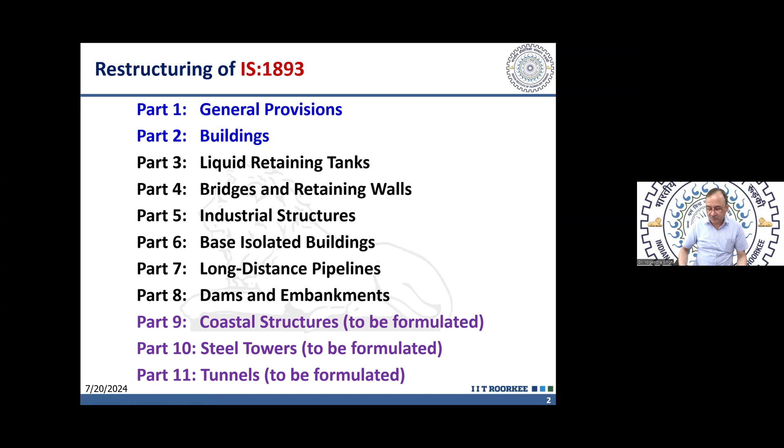And similarly, another set of codes will be under this number IS 13920. So parts will remain same. The structures which these parts will be dealing with will remain same. And in IS 1893, all the provisions related to calculation of the forces, earthquake forces on these structures, those will be dealt with. And in IS 13920, the design and detailing, in addition to the basic design codes. For example, in case of RCC, the basic design code is IS 456. So whatever is needed in addition to IS 456 from earthquake resistant design point of view, that will be covered by different parts of IS 13920.

And these parts, most of these are yet to be developed. These are not still developed. At the moment, only two parts are available: Part 1, general provisions, and Part 2, buildings. And rest of these will come in due course of time. But a placeholder is kept so that whenever these codes are developed, those can become part of this series.

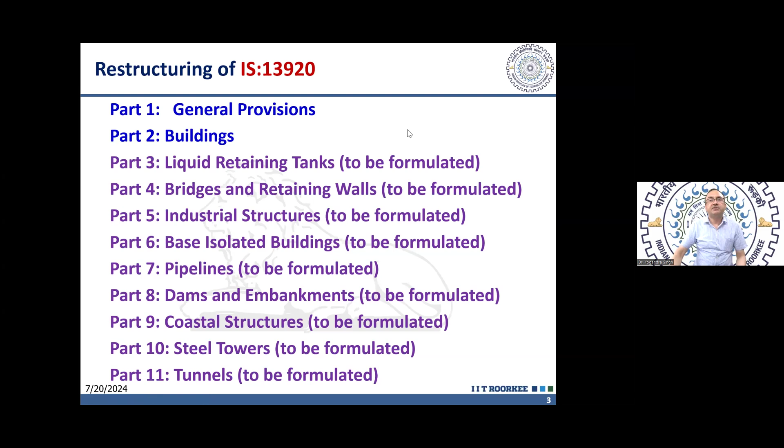So in IS 13920 Part 1, today we will discuss IS 13920 Part 1 and Part 2. And there are different sections in Part 1 and Part 2. Again, those sections also remain same. Those are dealing with the same type of structures. So for example, Section 1 is regarding the additional criteria for all structures. So as I said, this code is talking about additional criteria in addition to the basic codes.

So every structure has a basic code. For example, in case of masonry, the basic code is IS 1905. And 4326 was also dealing with some of the provisions. So whatever provisions were there in IS 4326 regarding design of masonry structure, those have been brought into this code. And similarly, some special publications or other codes were published time to time. So those have also been brought under this single volume, which will consist of 4 sections. So Section 1 will be regarding additional criteria for all structures. Section 2 will be regarding masonry structures. And what changes are occurring, that is also mentioned here.

The changes are occurring to harmonize these codes with other available provisions. Some provisions are being made part of it, and some provisions beyond CED 39 belong to a different committee. There will be harmony between those, so there should not be drastic or contradictory provisions in the two codes. That will be ensured through this revision.

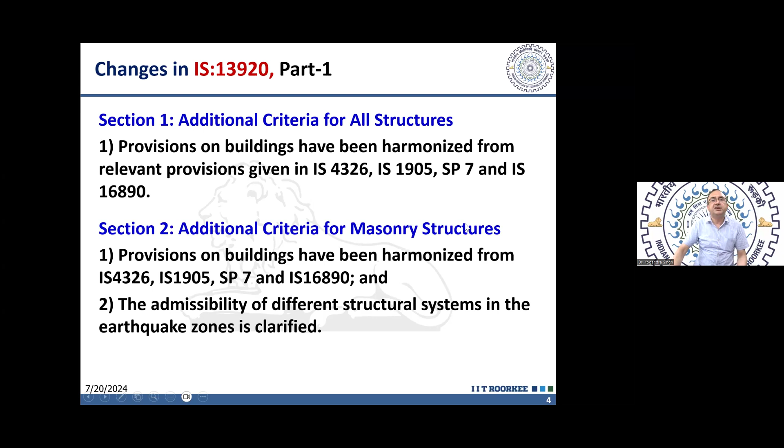Similarly for masonry structures, we are most interested in RCC structures, and today we will focus on whatever clauses are there in Part 1 and Part 2 related to RCC structures, because that is the most common type of construction in our country, and I guess most of you are also interested in RCC structures.

Steel structures are not that common, and masonry structures are generally non-engineered type of construction, or pre-engineered. So the code will provide prescriptive design guidelines which can be followed in masonry structures. We are not talking about those today, but if there is an interested group, we can have a separate discussion on masonry structures.

There is additional criteria for steel structures also. You may be aware that the ductile detailing code for steel structures was developed recently. So now we have a ductile detailing code for steel structures, and that will also be brought as part of 13920. So 13920 will deal with all types of structures and all types of materials of construction.

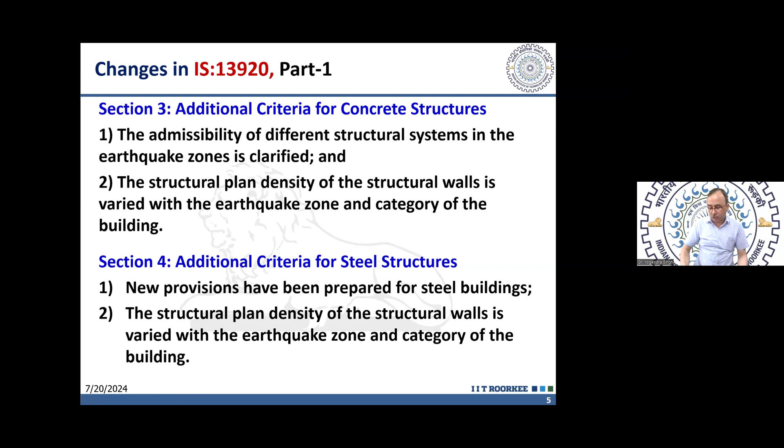Now in IS 13920 Part 1, let's first talk about Part 1, what this Part 1 is doing, and I will be highlighting those provisions where changes have been made with respect to the previous codes. Whatever changes are being made, I will try to highlight. Then after this presentation, we can have further discussion on these clauses as well as some other clauses in which you may be interested.

So from the questions, I have discovered that some interest is there in the changes being made in IS 1893 also. I'm not presenting the changes with IS 1893 because as informed by Mr. Parulekar, one session on that has already been done. So we are not discussing that, but if there is any specific question regarding IS 1893, also the revised or draft version of IS 1893, we can take that up too.

We are focusing here only on those provisions where there is a change. Those which are similar to the previous codes, I will not talk about. So in the scope, it has been clarified what this IS 13920 Part 1 is catering to. The purpose of this code is to enhance earthquake resistance of members and structures.

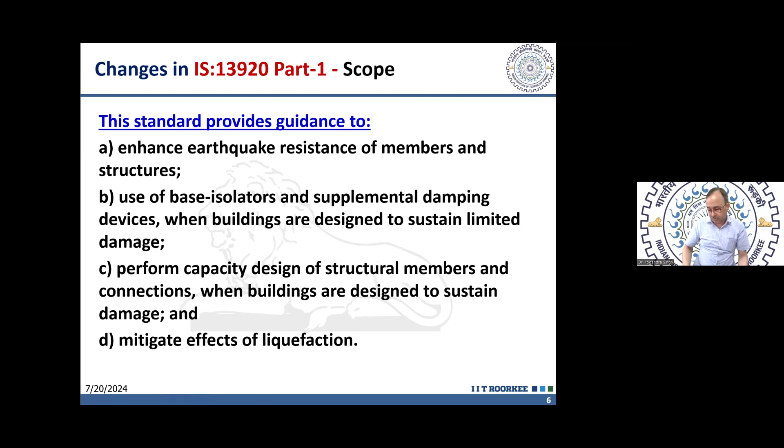And then mitigate the effect of liquefaction. Liquefaction was earlier part of IS 1893. Now it has been made part of IS 1893 revised, as well as 13920. Also some clauses have been added related to liquefaction.

Then these provisions included in this standard are also related to methods of design for architectural and equipments and other units. So equipment, services, and architectural features, all these together, they are calling AEUs. Earlier our code was not dealing with these, but AEUs are having an important role in performance-based design of any structure. For example, if we are designing a hospital building, then the architectural and these ancillary units, other non-structural components, their performance is also important. And this is particularly stringent in context of hospitals and other critical structures.

Then use of some of the building systems have been prohibited or restricted in some of the earthquake zones. So IS 1893 actually provides a table in which structural systems can be used in which zones. A table has been given. Although it is part of IS 1893 and not part of IS 13920, but I have taken that table from IS 1893, and we will spend a few minutes to discuss that also. So the designer has to choose the structural system as per that table.

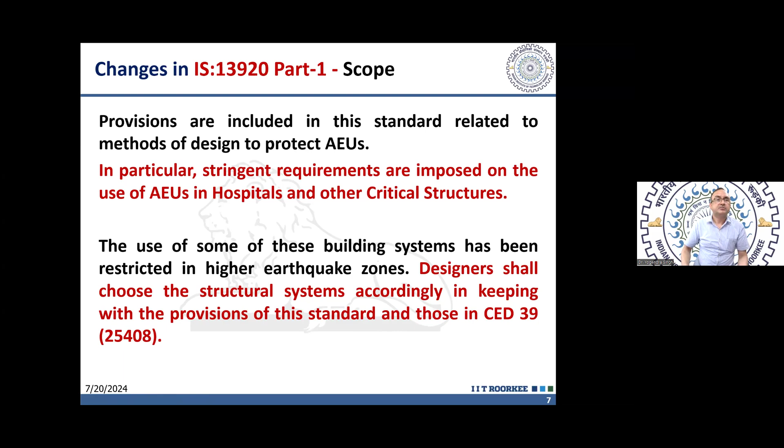Now in IS 13920 part 1, two types of, as I said, two types of structural design approaches are there. One approach is low damage design approach, and another one is the damage in structural elements.

So in case of low damage approach, no member of the lateral load resisting system shall sustain damage under effects of design earthquakes. So under DBE, all the members are expected to remain elastic. So that has now been quantified by the code. Earlier, it was not clear that when we are designing our structures, let us say using dampers or base isolators, then what we are expecting, what performance we are expecting. So that is now clarified by the code, that design we will be doing with this intention that under DBE our structures will remain, all the components will remain elastic.

Only under MCE level earthquake, some members will yield or will undergo damage. And this we can achieve by specially designed devices, which are provided at selected locations. And these devices will dissipate earthquake energy. And the structure will not require to damage itself to dissipate that energy. And that's how we will be able to achieve low damage.

The conventional normal design, which we have been following, that is in the category of damage in structural elements. And it emphasizes that if we are following the conventional methodology, the damage is inevitable. So it has clarified the objectives of design using response control devices, base isolation and damping devices, and the conventional design. That's a major change in IS 13920 revised.

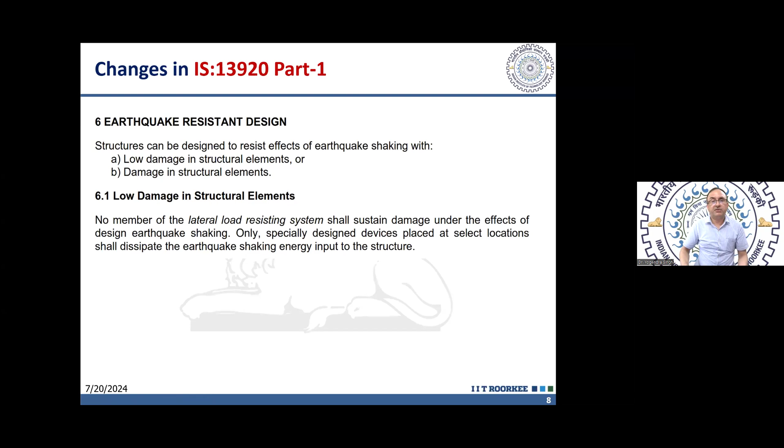Then the measures to mitigate effects of liquefaction at a site are also included. So many sites may be prone to liquefaction during earthquake. Earlier, we were not paying so much attention to liquefaction, but now the revised IS 1893 has given a lot of emphasis on design of foundations and geotechnical aspects, including liquefaction. So some part of that is included in IS 13920 part 1 also, and it provides two approaches to tackle with liquefaction. One is reducing the demand on the soil layer, which can undergo liquefaction, or increasing the capacity. So these techniques are put in two categories.

So those which are reducing the demand are stone columns and piles. If we are providing these, then we are reducing the demand, or we can enhance the capacity. For that, we have to enhance the compaction of that layer somehow, and that can be done through vibro compaction, vibro replacement, or surcharge. So if we are increasing surcharge somehow, then also the pore pressure which is developing will get counterbalanced, and the soil will not undergo liquefaction during that.

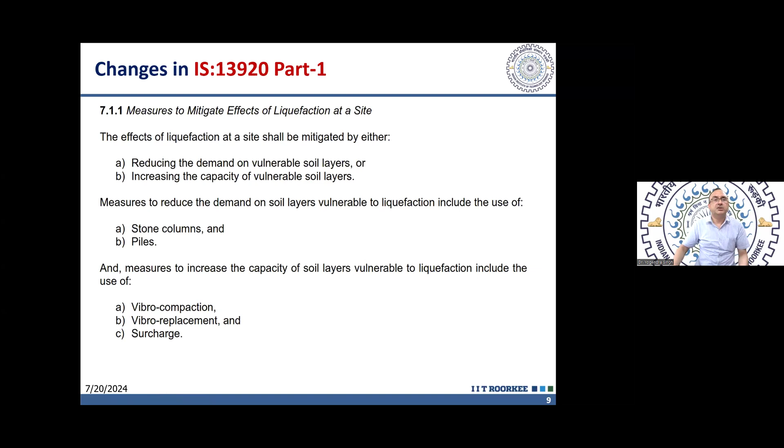As I said, architectural elements and utilities are given special emphasis in this revised code, both IS 1893 and IS 13920. IS 1893 deals with the clauses related to calculation of demand on these structural and non-structural elements.

In calculation of demand, we have to look into the acceleration at that floor level, so floor acceleration demand, and also the story drift demand. How to calculate that is dealt with in IS 1893. And then how to design for that demand is dealt with in IS 13920.

IS 13920 part 1 provides earthquake protection strategy. In case of AEUs, two types of such utilities are there: one is acceleration sensitive. These are generally located on the floor and are subjected to floor acceleration.

These can undergo overturning, sliding, or both. So some arrangement is to be made, some anchorage is to be provided so that these are not overturning and sliding.

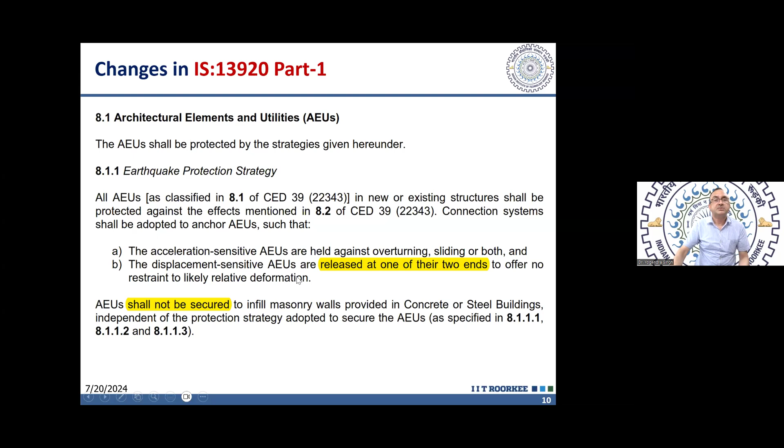In case of critical and lifeline structures like hospitals, special attention is to be given to these AEUs, and some restrictions are there. For example, false ceilings are generally restricted; we should not provide false ceiling in hospitals. If it is required due to medical reasons in any portion of the hospital, then it will not be hung from the soffit of the RC roof.

It will not be hung from roof, because during shaking this may get loosened from the roof and may fall down. Instead, it has to be connected with the vertical RCC components or the beams, but not masonry. It will not be connected with the RCC roof or with masonry components.

Tiles are also to be avoided wherever possible. In case of unreinforced masonry walls, tiles should not be pasted; instead, some sort of painting is recommended.

Similarly, facade made of stone, ceramic, glass, etc., which can dislodge from the structure and fall during earthquake, is restricted and prohibited. Any AEU should not be nailed to unreinforced masonry infill, or be connected or supported by unreinforced masonry infill.

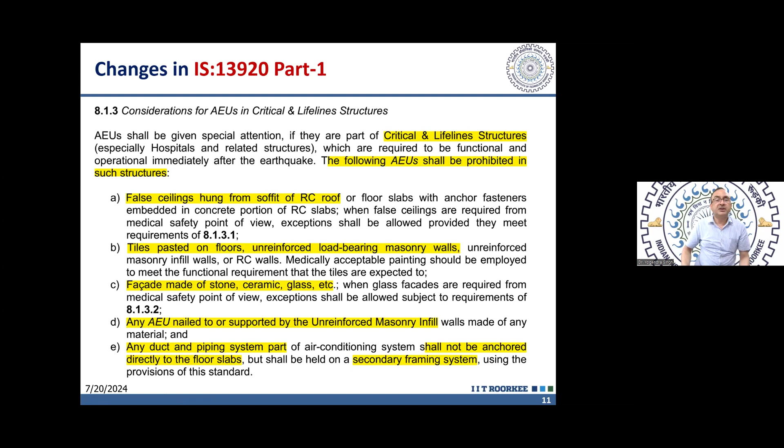Similarly, any duct or piping as part of air conditioning or other services will not be anchored to the floor slab. Rather, it will be provided with a secondary framing system, and that framing system is to be connected with the primary framing system to beams, columns, and shear walls. It will be connected using a framing, not hanging from the slab. So these specific requirements are given in relation to hospital and critical buildings.

This is further explained in context of false ceilings. First of all, false ceiling will be used only sparingly, as I said, not commonly used in case of hospital buildings, and these will be attached to a secondary system.

That secondary system should not be connected to the slab above, but it should be connected to the beams or vertical RCC members. And no false ceiling shall be anchored to unreinforced masonry walls, as I said.

In case when false ceilings cannot be supported by the roof, an independent system is to be supported from the floor slab bottom. It should not hang from the roof; rather it should be supported above the bottom slab. So a support structure, a secondary frame, is to be provided from the floor to the ceiling level.

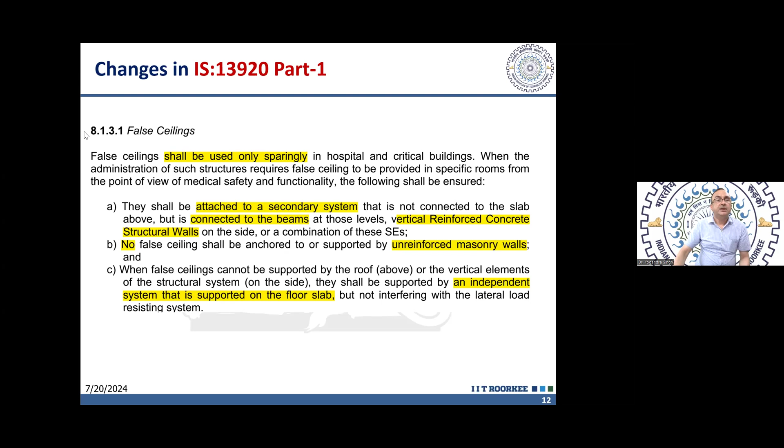Then in case of glazing, also again it is to be avoided in hospital buildings as far as possible. Wherever it is to be provided, it will be designed in such a way, because glazing is being considered as a drift sensitive or displacement sensitive component.

So it should be designed to absorb a lateral drift of R times delta, where R is the elastic force reduction factor and delta is the drift at that level. So whatever story drift is occurring, if it is connected between two stories, that much drift it should be able to sustain between the top and bottom level, and also from the sides.

So this mechanism which is holding the glazing should have the capacity to sustain out of plane vibrations also, because earthquake will have all the three components. So in plane displacement will be absorbed by this mechanism, while at the same time the out of plane acceleration is to be transferred to the structure. So it should be strong enough in the out of plane direction.

And what is important here, and maybe interesting to you, is that for all these glazing components, full scale experimental testing has been made mandatory. It is not specified in the code whether it will be done on shake table or whether quasi-static or pseudo-dynamic displacement testing will be adequate. That is not mentioned, but full-scale experimental testing is required so that it can be ensured that it can absorb the in-plane displacement and support the glazing in the out-of-plane direction, resisting the inertia force which will occur due to out-of-plane acceleration.

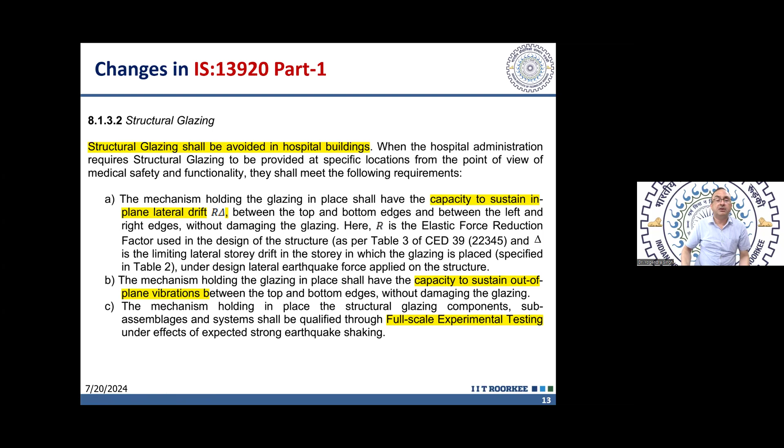So that was about IS 13920 Part 1. Let's now move to IS 13920 Part 2, which is about buildings. And again, this also caters to different types of buildings, not only RCC buildings, but also masonry, RCC, as well as steel buildings.

And the major changes which have occurred in this IS 13920 Part 2, that I'm going to discuss: Part 2 has a first section which is related with all structures. That means when we say all structures here, we mean buildings of different types. So those provisions which are relevant to all types of buildings are included in section 1.

Then section 2 is about masonry buildings. And the major change here is most of the provisions are a compilation of the previous codes. So whatever was there in IS 4326 regarding band and vertical reinforcement has been compiled here. And in 15988, whatever was available regarding confined masonry is also included here. Similarly, guidelines in 13827 and 13828 are also included. And a table is provided showing what type of masonry construction we can use in different zones, so based on this guideline we can decide what type of masonry constructions are suitable for different levels of seismicity. I will not talk about masonry buildings much.

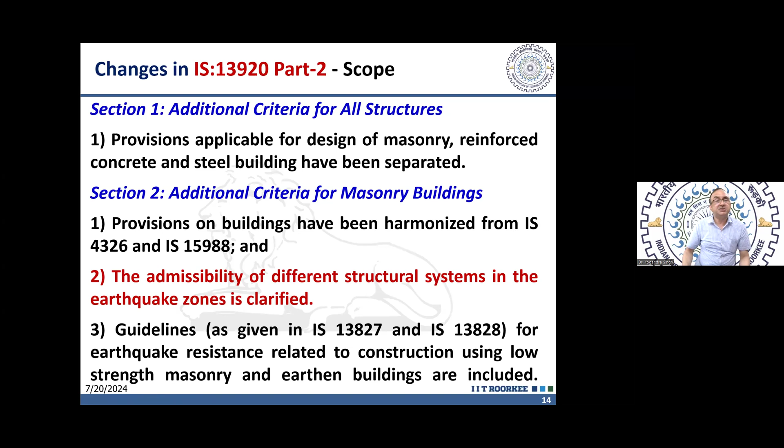Actually, we will be talking about the additional criteria for concrete buildings. And one criteria which the code has written in its scope is the admissibility of different structural systems. Actually, this is specified in IS 1893, not in 13920. That's already given in 1893, and the code is referring to that.

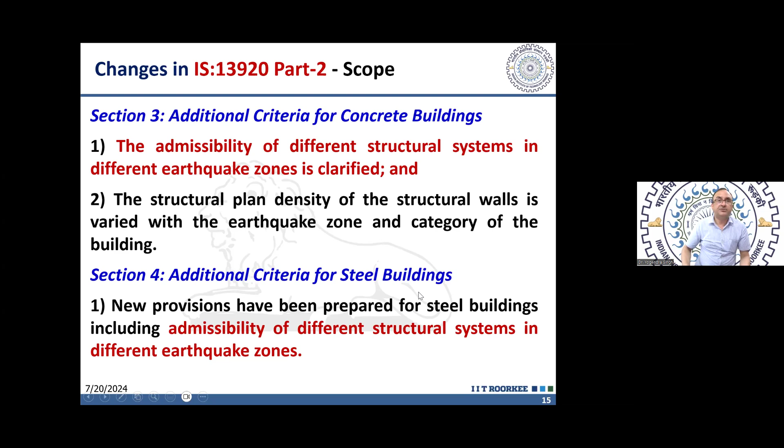And the code provides detailed provisions now regarding plan density of structural walls, and those are varied based on earthquake zone and category of the building. And then similar criteria are also provided for steel buildings as part of this IS 13920 Part 2.

Now, regarding general provisions or scope, IS 13920 Part 2 specifies that cold form light gauge steel members shall not be used as part of the earthquake load resisting system. It is not saying that these are outside the scope of this code, so that the designer is free to use his or her judgment and background and skills to design such structures. It has prohibited use of cold form light gauge steel structures, and this will have, as you can understand, quite severe implications.

So nowhere as part of the lateral load resisting system can these cold form light gauge steel members be used. What I can understand from the language of this clause is that you can use those as secondary systems or gravity load resisting systems, which are to be designed for the same deformability as the main or primary system, but you can't use these as part of the primary system. That's what is prohibited by the code.

Then the provisions of this standard are applicable for all buildings, and especially for critical and lifeline structures, special structures, nuclear power structures, additional requirements may be imposed by the associated authorities. So interestingly, it takes into account and talks about nuclear power plant structures also, which will be governed by this code, in addition to which there will be additional guidelines from the concerned authority regarding those structures.

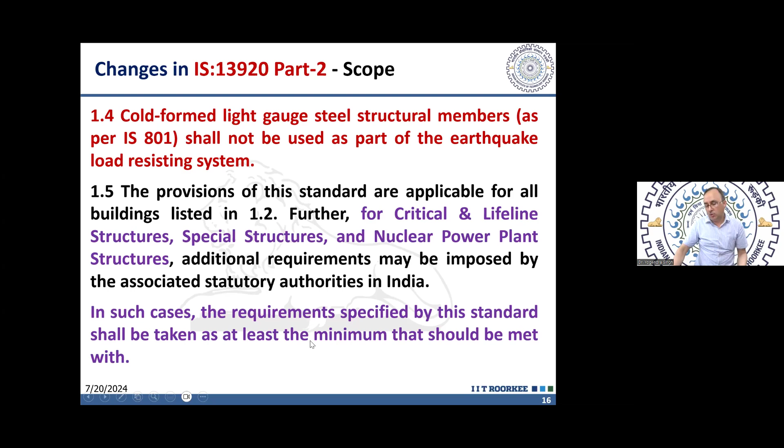The code says that whatever provisions are given in this code, those will be the minimum. So authorities can enhance the provisions and increase the minimum requirements of this code, but those cannot dilute below whatever provisions are given in this code. So those will act as minimum.

The provisions for RCC buildings given in this part shall apply to monolithic RC construction. This is very important, which have ductility to resist the effect of strong earthquake shaking. That means monolithic RCC construction we have to use.

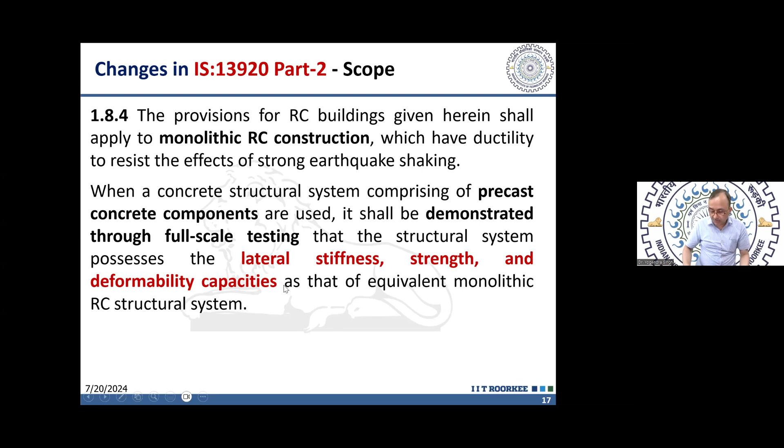If we are using precast concrete components, then we have to demonstrate through full-scale testing that whatever precast system we are using has lateral stiffness, strength, and deformability capacities equivalent to monolithic RCC system. So it is not prohibited. The code is not saying that we can't use precast, but this condition is put, and this condition is quite stringent, and it is not only complex, it will be quite expensive also, because we have to do full-scale tests to demonstrate that lateral stiffness, strength, and deformability of those systems. But in one way, it will be helpful that we can have some standard type of precast systems, which can be verified for one prototype using full-scale testing, and then it can be used repeatedly. So that is allowed by the code.

Monolithically cast concrete structures shall be designed based on the results of structural analysis using a single three-dimensional mathematical model. So this has been underlined by the code now. Earlier also we were using 3D models only. Nobody nowadays was using any 2D model or hand calculations in case of buildings - that was not possible. So those are quite cumbersome. So everybody was doing that, but now the code has made it mandatory that there will be a 3D system.

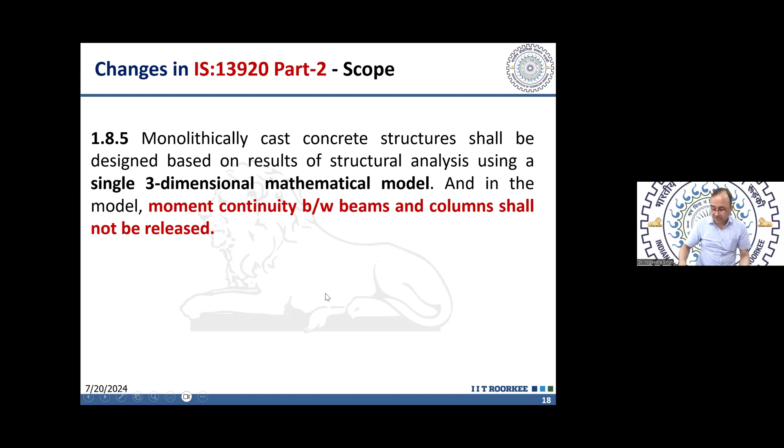And in the model, moment continuity between beams and columns shall not be released. So whatever model, whether we are having gravity columns or lateral load resisting columns, the release between beam and columns will not be provided. So whatever model we are making, the columns and beams will be monolithically connected physically as well as in the model. So many times we were doing analysis where we were releasing the beams and columns - providing releases at the junction of beam and columns. That is not allowed by the code now.

Along one plan direction of the building, we can have moment resisting frame plus shear walls along one direction. So we can have different structural systems in different directions. In one direction, we can have a combination of shear walls and moment resisting frames, whereas in the other direction, we can have only moment resisting frames. And perhaps that is allowed by the code, because the code is insisting that there should be a minimum 10% difference in the time period of the structure in the two directions. That difference generally can be achieved if we are providing shear walls in one direction and only frames in the other. So to achieve that, the code has made it clear that it is admissible - we need not provide shear walls in both directions. In one direction we can have MRFs only.

But there are other clauses. When we look at those, then it may be contradictory. So there are some clauses where the language is written in such a way that it can be contradictory. And maybe we can point out, as part of the comments, that some of the clauses are contradictory. This clause says that in the other direction we can use only RC MRFs, but RC MRFs are not allowed without shear walls in case of high seismicity zones. So this may not be applicable there. Then the options are: planar MRF plus shear walls, or only MRFs.

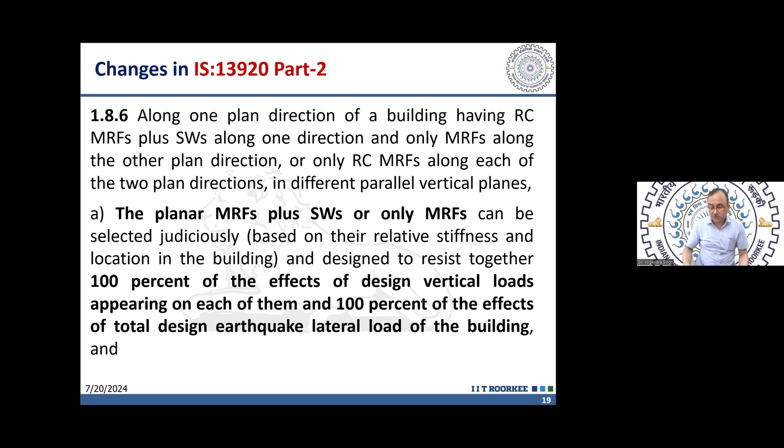So what does that mean? That we can decide the moment resisting frames to behave as non-lateral load resisting elements only if those are provided without shear walls in that plane. That means if the columns and shear walls are provided in the same plane, in the same frame, along the same bay, then we cannot treat those moment resisting frames as gravity frames. That's what is meant by this clause.

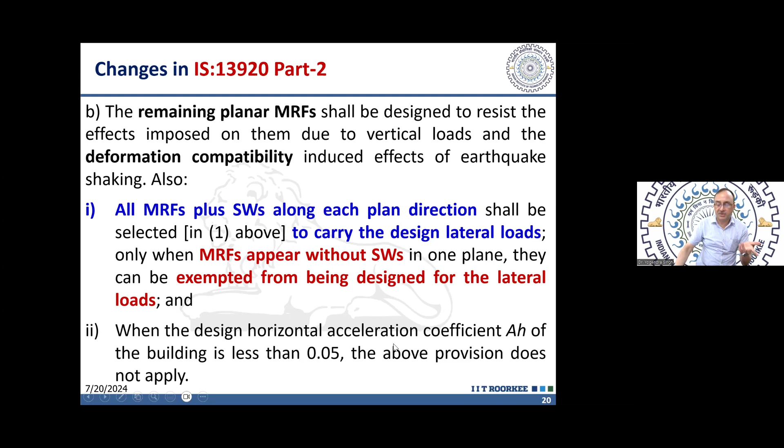And if those are different, if in one frame there are only columns and no shear wall, then we can design them without considering lateral loads. And in that case also, we have to keep in mind that the deformation compatibility is to be satisfied. So whatever forces come due to deformation compatibility, it is to be designed for that. And when the design horizontal acceleration coefficient AH of the building is less than 0.05, this provision may not apply, meaning that in that case, columns in the plane of the shear wall can also be designed as gravity columns.

Then it has been, although it was understood, but now the code has clarified that whatever design we are doing, we have to ensure these 5 properties from our design structure. One is stability, that it should be stable under load. It should not topple or overturn as a whole. So that is stability.

Then it should have sufficient stiffness so that the interstory drift of the building is controlled. Then strength. Strength is actually controlling ductility. If we are providing higher strength, the ductility demand will be less.

Then the code also talks about deformability. Now, this term has been introduced, but it has not been defined adequately in the code. So it appears contradictory to stiffness, because stiffness and deformability appear to be opposite. Deformability is the ease of deformation, or how much deformation the structure can undergo, whereas stiffness is reducing the deformation. So here we have to understand, there is a common understanding that if our structure is flexible, then its period will be longer, it will attract lesser force, and its seismic performance will be better. Now, this is not true.

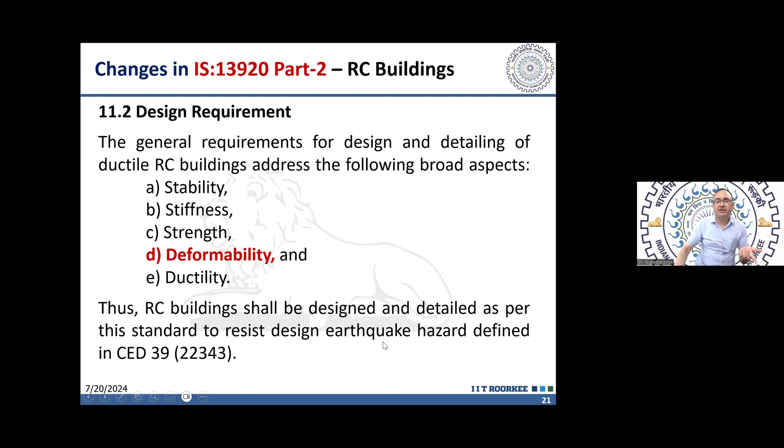So all the RCC buildings shall be designed and detailed as per this standard to resist earthquake hazard defined in - actually this is referring to IS 1893. So earthquake hazard will be defined by IS 1893, and this code, as I explained earlier, will be for designing and detailing RCC buildings.

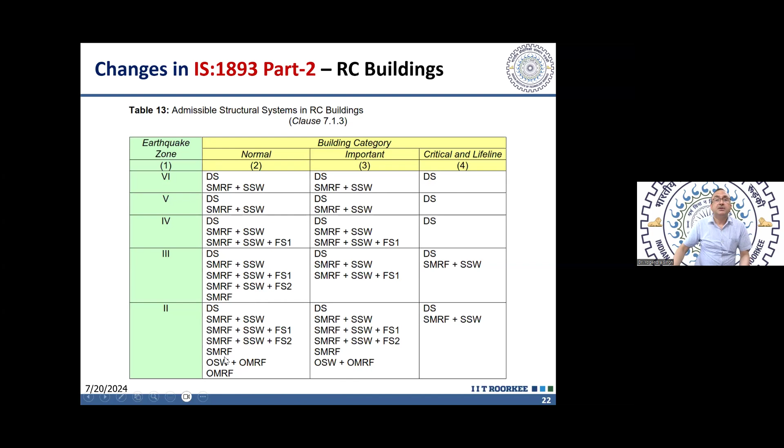So all those need to be brought to the code committee. Please look into it, and whatever comments you have, whatever comes to your mind, or whatever experience you have had in the past, that experience will be very important. Please bring that to the knowledge of the code committee, so that if any change is needed, it can be taken care of in time.

So to solve this issue of SMRF plus SSW versus dual system, I looked into the code again, IS 1893 part 2, to see how it is defining this. It defines special moment resisting frames with structural walls, which are designed as per IS 13920. In any case, all our special moment frames, shear walls, and dual systems are being designed for 13920, so that does not differentiate.

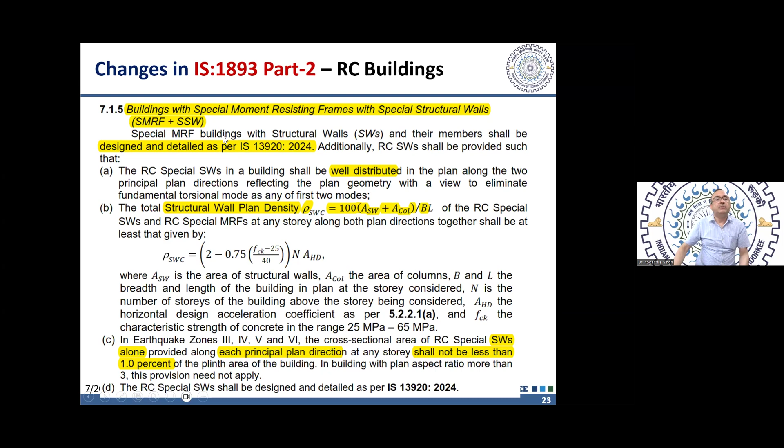Now, it classifies this shear wall plus moment frame system as the one having well-distributed shear walls, with the plan density of shear walls given in a certain way. On the other hand, when talking about dual systems, it refers to special shear walls and special MRFs existing in the same principal plan direction in a single plane. That means within the same frame line, the shear wall and the frames are existing, so columns are in the plane of the shear wall. Then it is called a dual system.

It is not clearly defined in the code, but from these provisions I could make out what the code is trying to say. It is trying to differentiate dual system from frame plus shear wall system. Dual system is where the frame and shear walls are in the same plane, part of the same planar frame. Whereas in case of frame and shear walls, the frames can be in separate planes. Some bays may have only beam-column frame, and some bays can have only shear walls, or a combination of shear wall and frame. So that is the difference.

So in case of dual systems, the column should be part of the same frame, then it will be qualified as dual system. You can see from the table of response reduction factor given in IS 1893 that the response reduction factor provided for dual system is higher as compared to shear wall, special shear wall, and special moment resisting frames.

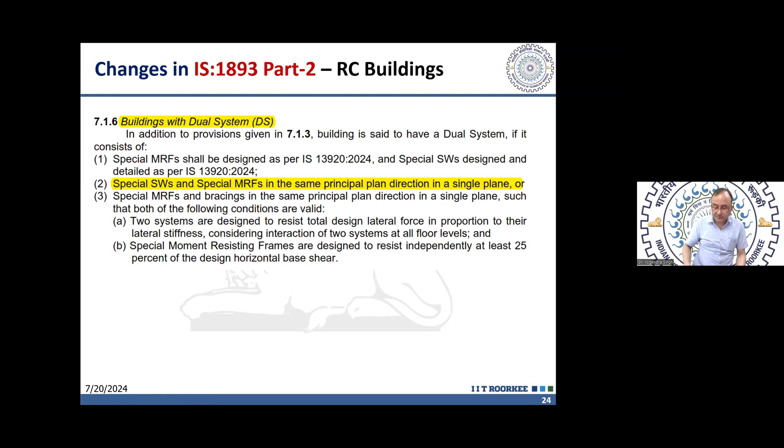Then the limits - I come back to 13920 again. That part I took from IS 1893 because I thought it is relevant to understand the provisions of IS 13920 also. Coming back to IS 13920 part 2, there are clauses about beam cross section. We already had these clauses, but some changes are there, regarding the detailing of minimum reinforcement at different faces of a beam. The revised code says that at the bottom face of the beam framing into a column, at the face of the column, the reinforcement will be 75% of the steel on its top.

Earlier this was 50%, so this will be 75% in beams that are part of the lateral load resisting system. That means those which we have not designed as gravity, we are designing those as lateral load resisting systems. So the reinforcement at the bottom face, we know it comes out lower as compared to the top face, because at the top face the gravity moment and earthquake moments add together, whereas at the bottom face those act in opposite directions. One is hogging, the other is sagging. So the reinforcement will not be less than 75% of the top. So this is a change.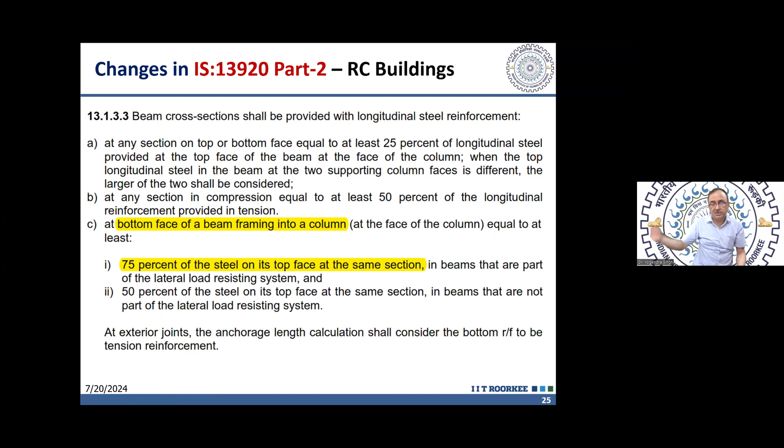Whereas in other cases where the beams are not part of the lateral load resisting system, then we can go with 50%, so there the limit is 50%. Even on those beams which are not part of the lateral load resisting system, which we are designing as a gravity system, there also there is a limit of 50%, which was there earlier. So that limit is still applicable.

Now in capacity design, calculation of design shear force is an important issue. We have to calculate the shear capacity and compare it with the demand, and demand will come from capacity design as well as the applied force. Earlier we were considering only the transverse steel. The concrete contribution was not allowed in seismic conditions, and that has been taken from ACI 318, which explains in its commentary that during an earthquake, due to cyclic loading, the concrete will crack and deteriorate, so the capacity of the section as a whole will deteriorate. Due to that, it was saying that if we ignore the contribution of concrete in shear, that will compensate for that deterioration in shear capacity.

Now in the revised code, the code says that we can take contribution from the closed loops, we can take contribution from the ties, and we can also take contribution from uncracked concrete in the cross section. Now this is a little bit complicated, because we have to calculate that portion of the concrete which is in compression, and it is also not clear - some portion of the concrete which is in compression for one direction of the earthquake will be in tension when the earthquake reverses direction. So whether the code means the uncracked section above the neutral axis for that direction of loading which we are considering, or overall, that is not clear.

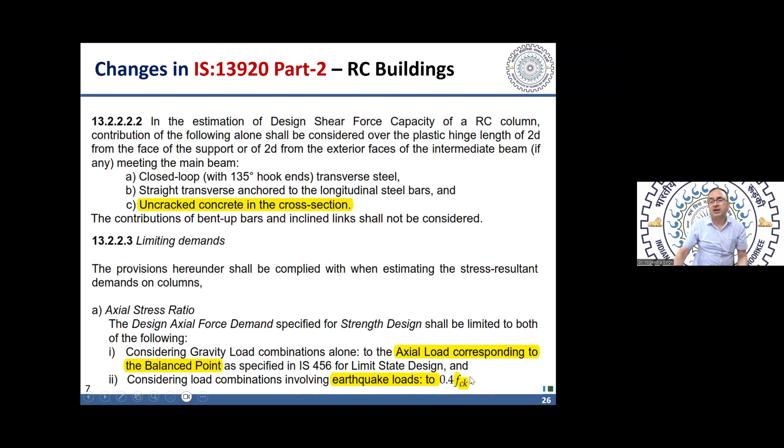And that control is that in case of gravity load combinations, the maximum permitted axial load is up to the balanced point - the balanced failure axial load, where the bending moment is maximum; up to that point we can allow under gravity load combination. And in case of earthquake load combinations, those combinations in which earthquake load also appears, the stress over the cross section should not be more than 0.4 FCK. So compressive stress due to axial load is reduced to 0.4 FCK. And this is on the gross section - although the code has not clarified this, this provision was there earlier also, and it is available in other codes. So it refers to 0.4 FCK on gross section.

Then this clause was there earlier also, that the column should be stronger than the beam, and the ratio of column strength to beam strength should be more than 1.4. Now this has been further elaborated. Earlier it was just given that the summation of moment capacity of the columns should be more than the summation of moment capacity of the beams into 1.4. So this has been further explained. Four combinations are possible, so the code is clarifying that this check is to be made in the two directions separately. So in the X direction, we will consider two cases, when the earthquake is considered in minus X direction and when the earthquake is considered in plus X direction.

MUC represents the capacity of the column, and MUB represents the capacity of beam, and H represents hogging, and S represents sagging. So when we consider the summation of the moment capacity, one beam will be in hogging, another beam will be in sagging, due to one direction of earthquake.

Similarly, we calculate the moment capacity of the top column and the bottom column. It will be at the top of the bottom column, and here it is bottom of the top column. So top column's bottom and bottom column's top. That is clarified. It is the same provision, only the code has clarified it.

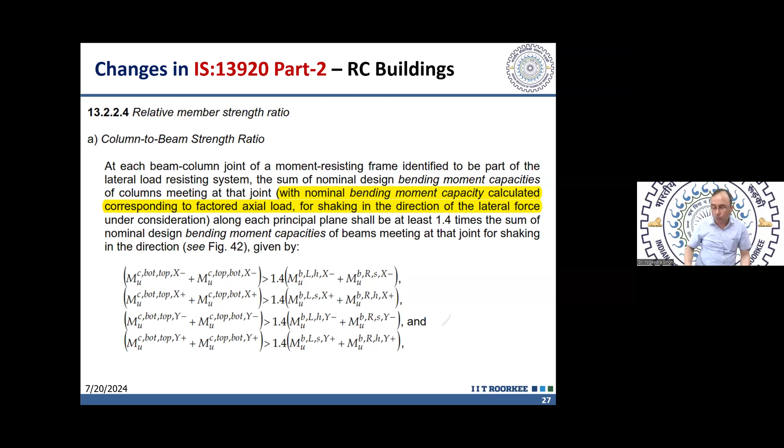Then in case of structural walls, most provisions regarding minimum dimensions are the same as earlier. What I found interesting and new was this: the minimum thickness of 300 millimeter was for coupled structural walls - earlier also it was 300mm for coupled structural walls. What has been added is that buildings with beams framing into the wall in the direction perpendicular to the minor axis - now the language is a little complex.

Try to understand the direction perpendicular to the minor axis - what does that mean, what is the minor axis? The minor axis is the one which is in the plane of the shear wall, so the horizontal direction in the plane of the shear wall. In other words, it means that if a beam is connected to the shear wall perpendicular to it, then the thickness should not be less than 300 millimeters. That's what it is trying to say.

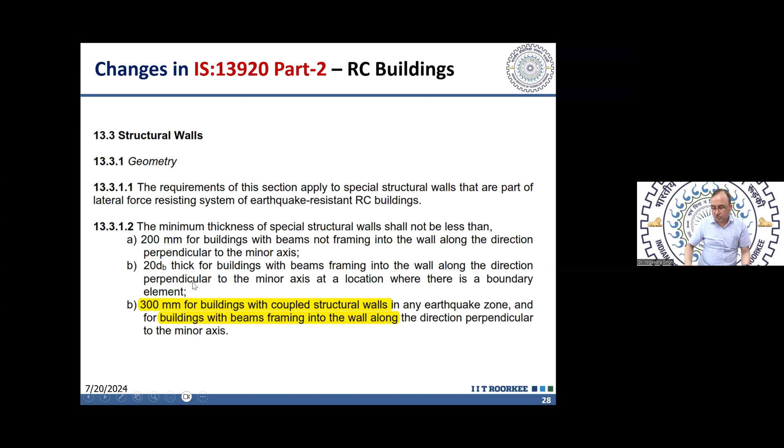And it should also not be less than 20 times db - that clause was already there, so the same has been reproduced.

Only if the bending - this clause is related to confusion that was there, and I have discussed this issue in some of my earlier talks with Epicons, through the Epicons platform. There was a lot of confusion regarding what is a column and what is a shear wall, and when we can design a column as a shear wall. I have presented this in the code committee also - that actually it will not depend upon the size of the cross section, it will depend on the shape of the bending moment diagram.

I had shown this earlier, I could not copy that slide, otherwise it would have been good to show it now. In case of a shear wall, the bending moment is not changing its sign within a story. For example, in case of a column, the bending moment at the top and bottom is causing curvature in opposite directions - tension is on different faces. So a frame member, that is a vertical column member, will bend in double curvature, meaning the sign of the moment at top and bottom will be different, and there will be a point of contraflexure in the middle.

So what the code says is that a shear wall is that vertical element which has a single curvature along the full height of the building. This matches with what we had discussed earlier, that shear wall will try to... but there is one difference here: sometimes when we have shear walls coupled with frames, in a dual system, it is possible that the direction of the bending moment may change at one point.

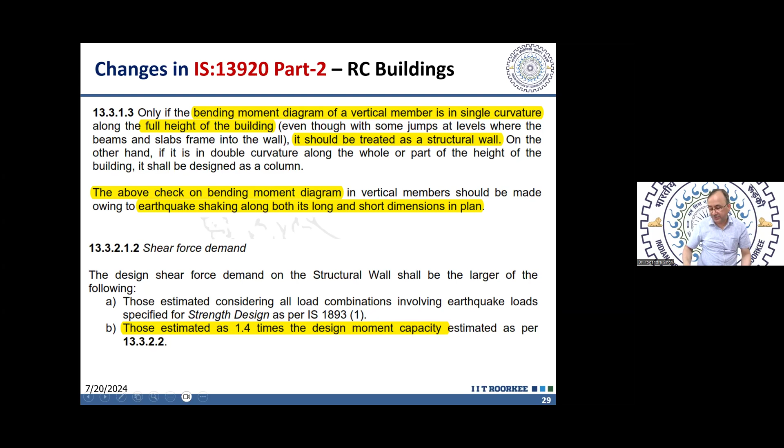If we look into the provisions given in ACI 318, more clauses are needed, because it is not just calculating the shear force at the base, the distribution of the shear force along the height is also important. That part is still not given by our code, so we will have to refer to ACI 318 for that. We can point out that the distribution of shear along the height should also be proposed by the code, so that not only the shear reinforcement at the bottom can be checked, but shear reinforcement and even vertical reinforcement at any level along the height also needs to be checked.

Then a similar clause as was there in case of columns on axial load ratio has been provided for shear walls also: under vertical load combinations, that is gravity load combinations, shear walls should have axial force within the balance point. Every shear wall will be designed for earthquake load, but in combinations where earthquake load is not there, we can allow up to balance failure, and when earthquake is there, we will allow up to 0.4 FCK.

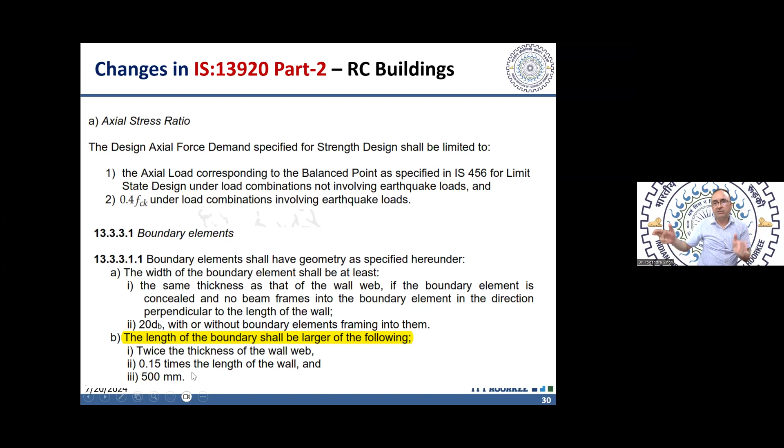Then this is quite useful. Earlier, our code was not clear about the length of the boundary elements - what portion of the shear wall should be confined as boundary elements. So that has now been included. Although it is simplistic, some guideline is there: the length of the boundary element will be 2 times the thickness of the web, or 0.15 times the length of the wall - 15% of the wall on each side - or minimum 500 millimeter. So minimum 500 millimeter length will be confined as boundary elements.

Then the confinement reinforcement will be same, design of these is similar. Only thing is one clause on spacing has been included in this revised code - 100 millimeter - but may be relaxed to 150 millimeter if maximum distance between cross ties and parallel legs of the link is limited to 200. So if we are limiting the horizontal spacing between the ties, the vertical spacing can be increased up to 150 millimeter. But interestingly here, the code says 100 millimeter, and then it says need not be less than 100 millimeter.

So this is not very clear, the language is not very clear. Perhaps this 100 millimeter - I don't know, it can't be related with this 150, it can't be related with this 100 millimeter also, because in that case it will be in 100 millimeter only. In any case, it will be 100 millimeter, because it can't be more than 100 millimeter, and it need not be less than 100 millimeter. So some issue is there in the language, that we need to find out - the code committee has to look at it.

Now, further useful guideline is given here. When a beam is framing into the minor axis of the wall, then the boundary element shall be provided at that location. This issue we have also discussed, that when a beam is connected to the shear wall in the out-of-plane direction, wherever it is connecting, there also we have to provide a boundary element, and this will be provided for the full length of the wall. The design of such a boundary element shall meet the requirements of minimum column dimension - whatever minimum column dimensions clause is already existing, there is no change in that, so minimum dimension 300 millimeters will be satisfied by this boundary element also. And the minimum column to beam strength ratio of 1.4 will also be ensured when the beam is framing into the shear wall in the out-of-plane direction.

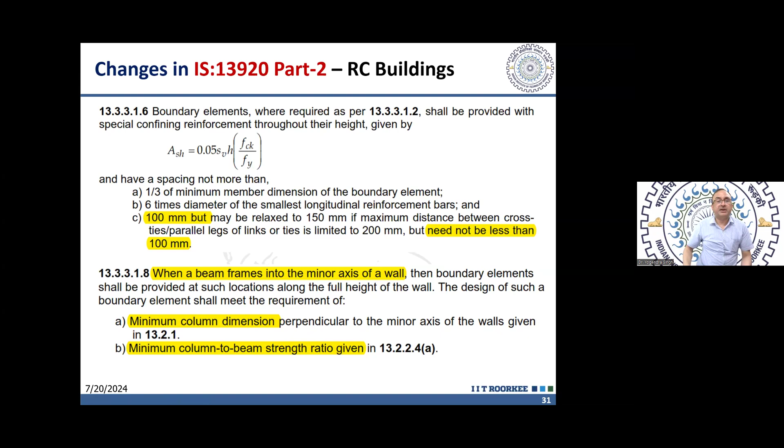Similarly, in case of coupling beams, now two types have been classified: flexure controlled and shear controlled, depending on the span to depth ratio. If the span to depth ratio is less than 5, it is called shear controlled; if greater than 5, it is flexure controlled. Different governing criteria for flexure controlled and shear controlled beams is given. If it is flexure controlled, it will be designed as per normal beam criteria - whatever capacity design is to be performed for normal beams will be performed. If it is shear controlled, then we have to design it with diagonal reinforcement. The diagonal reinforcement provision is same as it was in the earlier code.

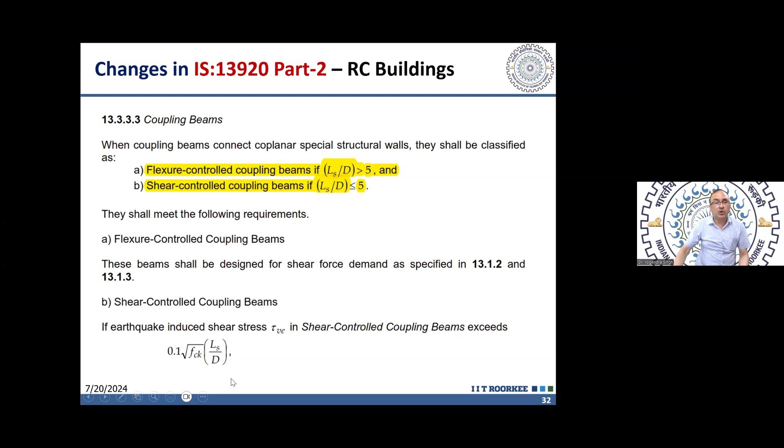So I'm not going into that detail. But what has been specified here is that the shear stress is more than this, but it has to be less than tau c max. So in no case the shear stress in coupling beam, even when it is provided with diagonal reinforcement, can be more than tau c max.

The expression for tau c max has been taken from the revised, or rather under-revision, IS 456. You may be knowing that IS 456 is also under revision, although the code has not come out. I have not seen the draft code, and I don't know whether it is still in wide circulation or not. At least I have not come across that copy, but some information I have got from people in the code committee is that there are revisions, and specifically the shear capacity clause is being revised significantly. And that portion of IS 456 has been reproduced in IS 13920, part 2 or part 1, I do not remember, I think part 2. So that is also there, and this has been taken from that only.

So tau c max can be calculated like this, but here they have taken the strength as square root of f ck, and they have taken 5 MPa as a constant. So tau c max will be calculated using this formula. Suppose we assume that there is no axial force, so this will be 5 MPa. So the shear stress cannot be more than 5 MPa irrespective of the grade of concrete. That is the final implication of this clause.

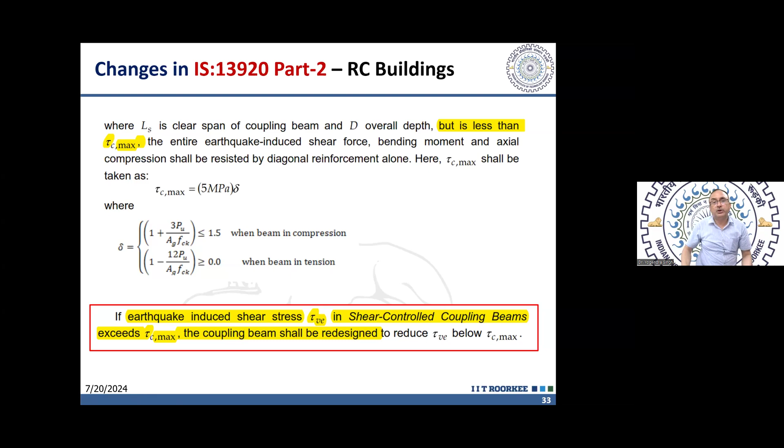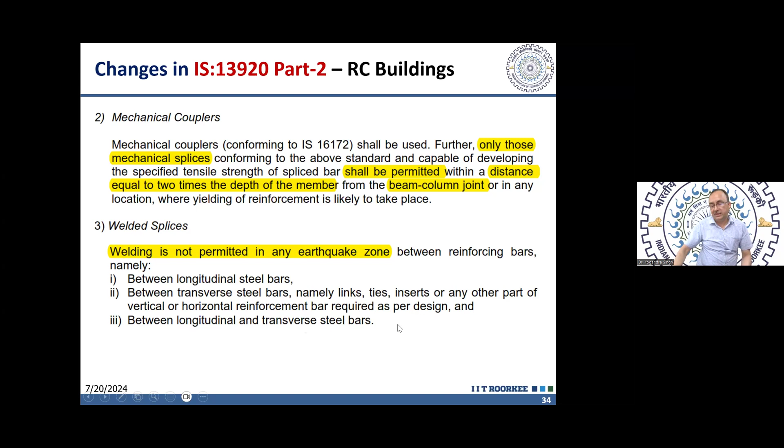Then some clauses about mechanical couplers and splices are there. What I found interesting is this: although it was intended earlier also, now it has been very explicitly written that welding is not permitted in any earthquake zone. So any type of welding between longitudinal bars, between transverse bars, or between longitudinal and transverse bars, no welding is permitted. That is made clear by them.

Then there are some clauses which clarify regarding design and analysis. Regarding design, it has been clarified that special moment resisting frames may be used in any earthquake zone except in buildings taller than 15 meters. Now this is somewhat contradictory to the table I have shown in IS 1893, because there it shows that in zone 5 or zone 6, a special moment frame alone cannot be used, whereas here it says that up to 15 meters we can use that. So this harmony between the two codes needs to be ensured. These should not have contradictory provisions. That is what I wanted to highlight here.

And then in analysis, when two moment frames - this is again a very interesting provision which is going to modify how we configure our buildings - when two moment frames oriented in orthogonal directions intersect, the possibility of beam yielding in both orthogonal directions simultaneously shall be considered. And it is preferable to plan buildings to have independent planar lateral load resisting moment frames in each direction. Now what does that mean? It means the orthogonal frames are not independent, so it wants to clarify that. What are these independent frames? Like the perimeter frames, where there are no common columns between the two frames. So those types of frames are preferable. That's what this clause is trying to say.

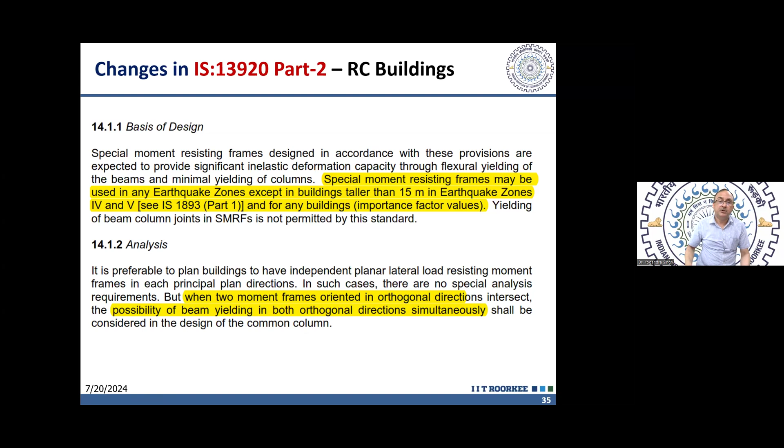Now it is not very clear how that will be ensured. Perhaps it is intended that if we follow the detailing for the joint already in our code, regarding provision of stirrups in the joint - 50% in case of confined joints and 100% in case of unconfined joints - and then check the joint in joint shear, those clauses are already there. So perhaps if we follow those, this clause will be deemed to be satisfied.

But the code is specifying this without specifically mentioning how it will be ensured, how in design it will be checked. Then it is preferable to plan buildings to have an independent planar layout. This is something similar to what I was discussing earlier. So we have to plan.

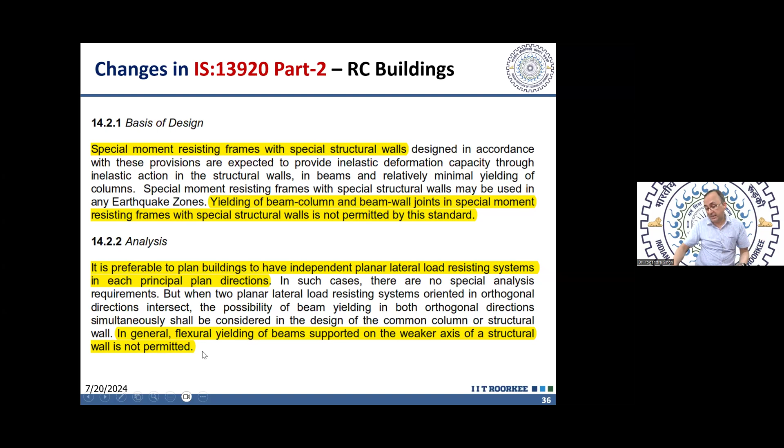Now this is not clear - what does that mean? It means the beam will be designed stronger than the shear wall in the out-of-plane direction. It says 'not permitted,' not that it should not occur - it's very rigid. Beam supported on weaker axis means out-of-plane beams, so those beams connected in the out-of-plane direction to the shear wall will be designed to remain elastic. Perhaps that's what the code means. So that appears to be a stringent criterion which we need to consider.

Then, as I said, I was also a bit confused about the dual system. There are some criteria for dual systems also given - it is mentioned that along any one plan direction, at least two planes of dual system should be provided. So here it refers to planes of dual system, meaning that in the same frame, along the same line, we have a shear wall as well as a moment column frame. Then we call that the dual system.

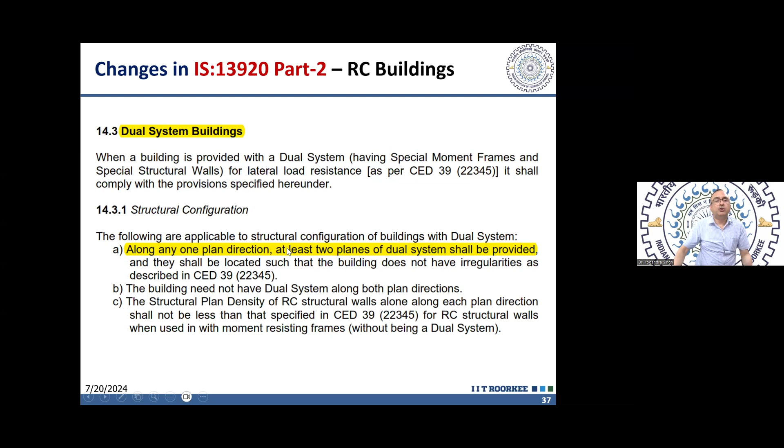So these were the points which I thought are interesting and different from the previous code. There may be other interesting points too which may be of interest to you, but those were already existing in the previous code, so I have not discussed those. I will stop here, and we can now take up the questions.

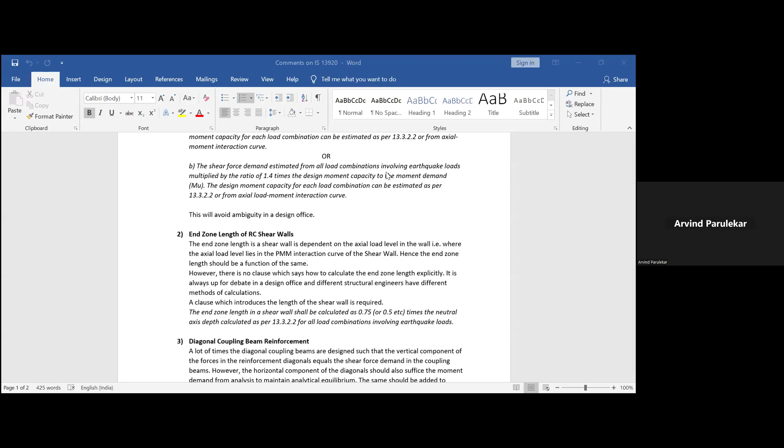Yeah sir, Arvind ji, I have shared the screen. Yeah, you already shared the screen. I think there are 3 points.

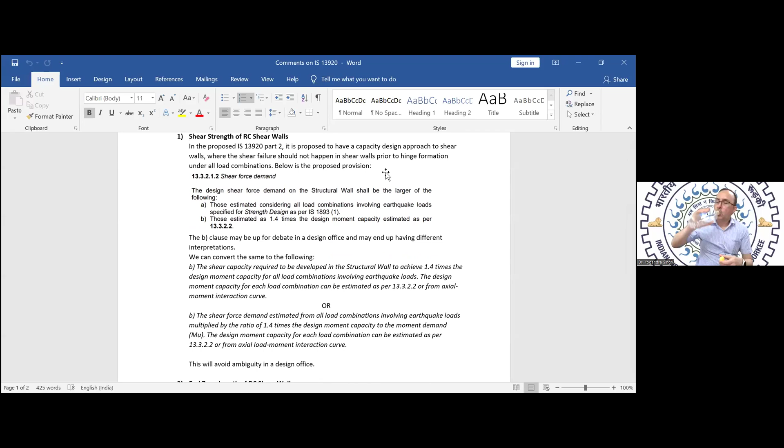You can continue. So this was a much needed clause in RC shear walls, that capacity based design be followed. However, this particular codal provision, where it's estimated as 1.4 times the design moment capacity estimated as per 13.3.2.2, is not a very clear statement according to me, and it might lead to ambiguity in a design office. I'm talking in terms of a design office.

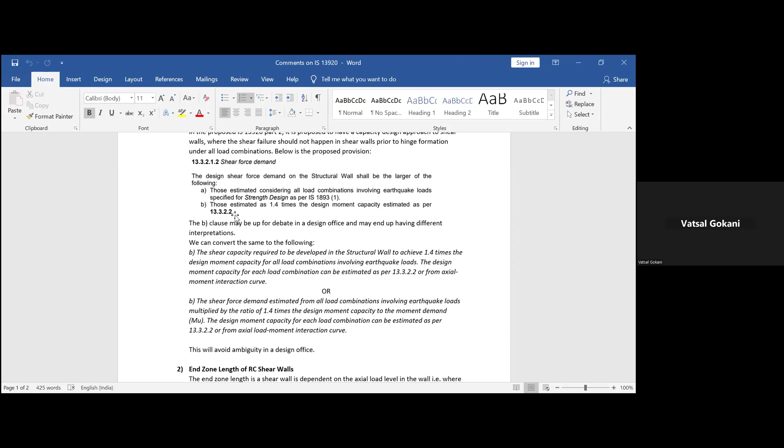So maybe we can have something like the shear capacity required to be developed in the structural wall to achieve 1.4 times the design moment capacity for all load combinations involving earthquake loads, or in the ACI 318 format, where the shear force demand estimated from all load combinations including earthquake loads is multiplied by the ratio of 1.4 times the design moment capacity to the moment demand MU.

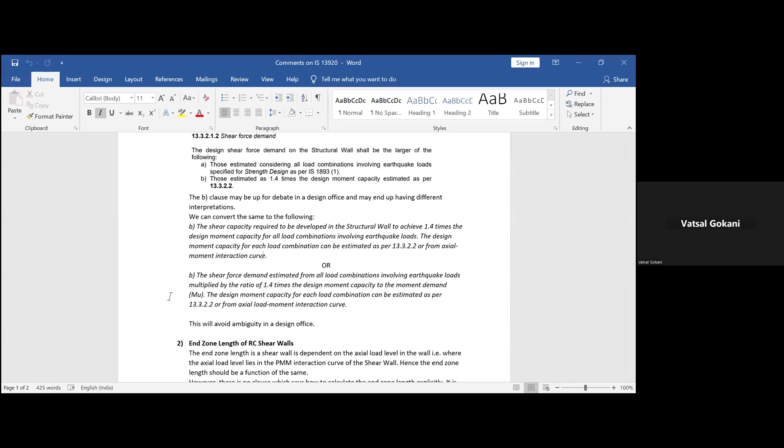Right, so I think this will be easier to follow in a design office. I fully agree, because there is no direct relationship between shear force and moment. If you know the moment capacity of the shear wall, you can't calculate shear force directly. There is no length or equivalent height available that you multiply shear by to get moment, and vice versa.

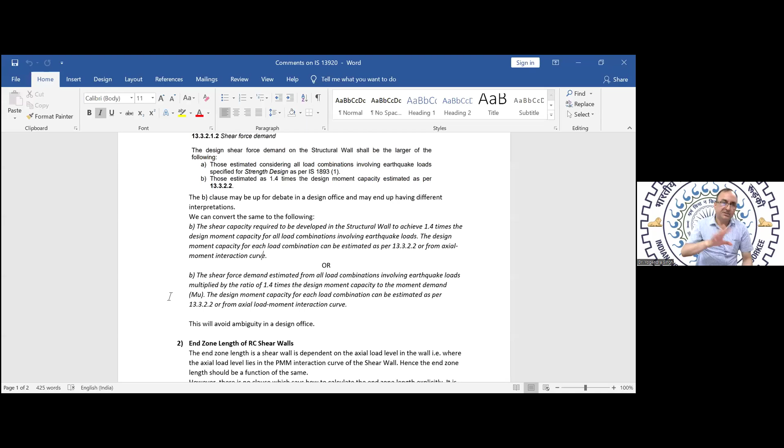So the relationship between shear force and bending moment in that system is reflected by the ratio of the shear force and bending moment when we have performed analysis for different load combinations. So that is clear from the suggested language.

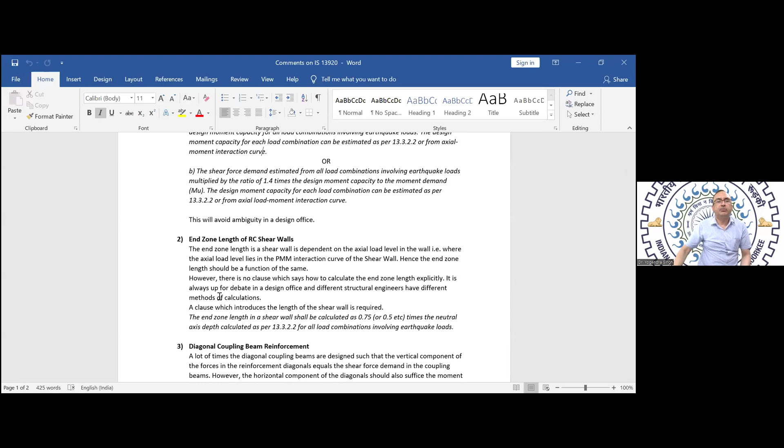So I think we can definitely propose this to the code committee, because this is a serious issue. And I will also suggest that the distribution of the shear force and bending moment along the height, the shear force envelope and bending moment envelope, should also be provided, because it is not design only at the base. We have to design along the full height, at all floor levels.

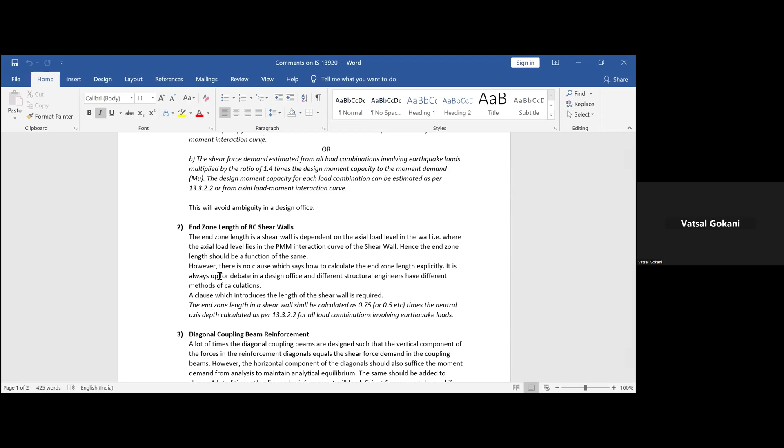Secondly, we had done this exercise in our office where we were finding out the boundary zone length based on the end zone length, based on the neutral axis depth as per ACI 318 or the Eurocode. And we are finding that 500 mm or 0.15 LW is, even when the load is at the balance point or around the balance point, much smaller than what is required as per these codes.

And we have a very nice formula in our IS 13920, which gives the XU by LW. So if we can calibrate the end zone length based on XU by LW, it's a simple formula, just a one-step calculation in Excel. So maybe we can give a recommendation regarding the end zone length dependent on XU by LW, so that the force aspect is completely removed and the capacity aspect of the end zone remains.

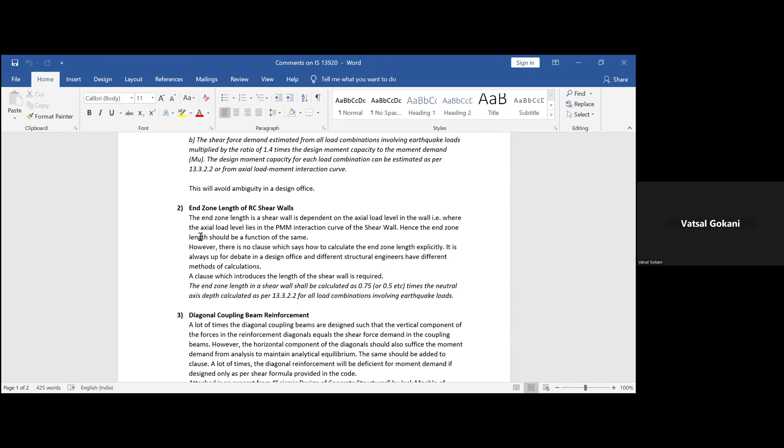The reason I'm stating this is that there are a lot of times that two different practices, two different offices will produce very varied end zone lengths depending on their philosophy, and they can vary 2 times, 2.5 times, 3 times also. So I think some rationalization there, if you can suggest to the codal provision, that would be great.

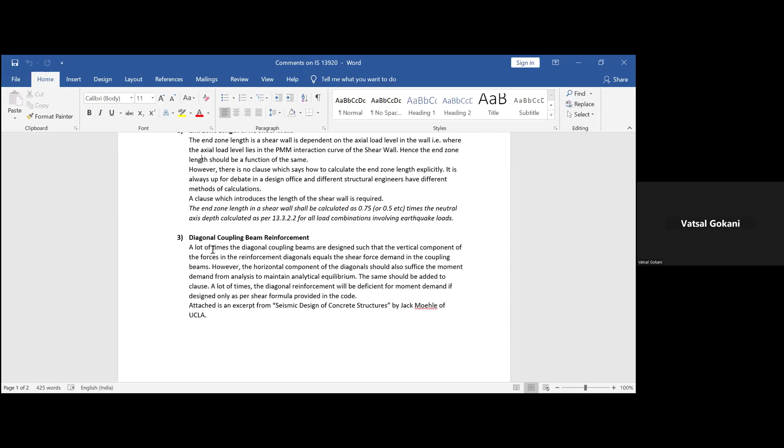I was under a different notion here. I was thinking that both should give the same result, because equilibrium is to be satisfied. And when we are satisfying equilibrium, the relationship between shear force and bending moment is also governed by the geometry, and this force component of the diagonal is also governed by the geometry. I was thinking, although I haven't done any exercise, that whether you calculate using shear force or using bending moment, it should come out to be the same area. I don't know whether you have checked that.

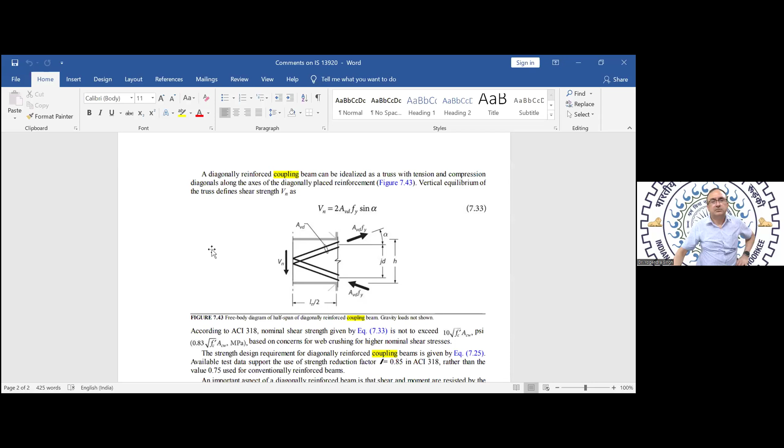Sir, have we checked that? At least for a lot of buildings, because we have our spreadsheet calculation where we calculate the Avd based on the shear and the Avd based on the moment. And generally, a lot of times, especially in the range of L by D approximately 2, we are getting that the Avd is governed by the moment. I don't know the reason why the analysis gives this - please share some of the calculations.

Yeah, so we can look at that, sir. We'll do that. So maybe a formula for a moment also, so that we remain on the safer side.

I was under the impression that both should come out to be the same, because there is a relationship between Mn and Vn, right, and that also comes from the span L by 2, and this will also come from that L by 2. So sir, I'll share you certain calculations, let's look at some real calculations. Then we can understand better.

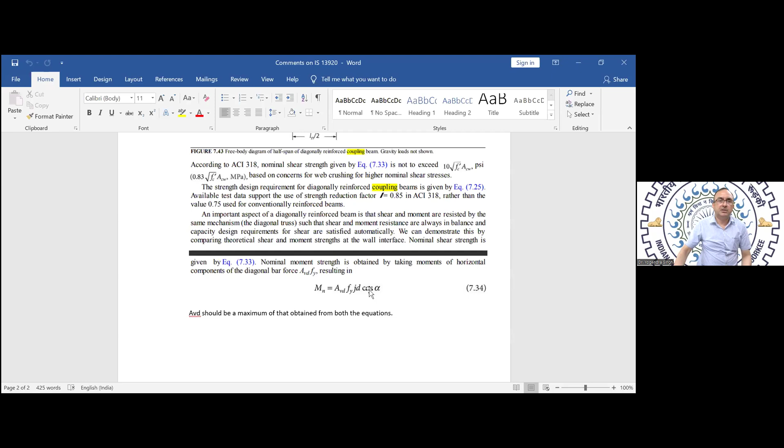One more question I had, mainly with respect to the links, the ductile links. We say that we should limit the FY to 415. For shear, a lot of codes around the world allow, for the calculation of ductile, they go up to even 700 MPa. So is there a reason within our code? The reason was simple: the old code was based upon experimental results, in which only up to that level it was tested.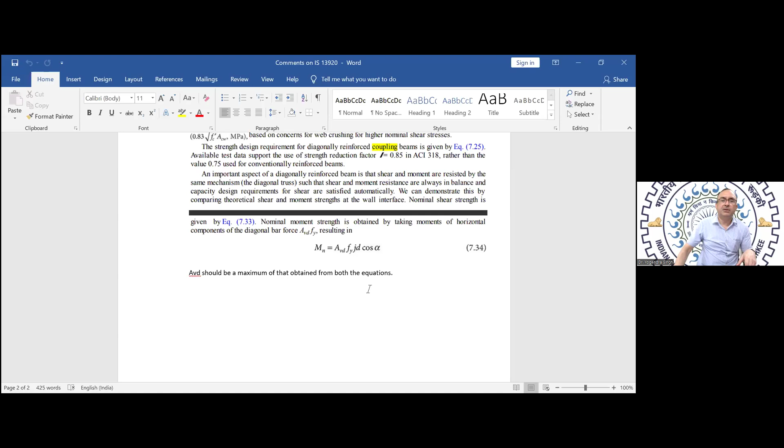But now that is actually part of IS 456, not 13920. So in IS 456, changes are being made, and that issue will be taken care of. I have heard from one of the committee members of IS 456 that they are taking that into account.

Okay sir, these are the questions from my side. Okay, perfect, questions as well as suggestions, that's what we want. Thanks a lot, sir. Thank you.